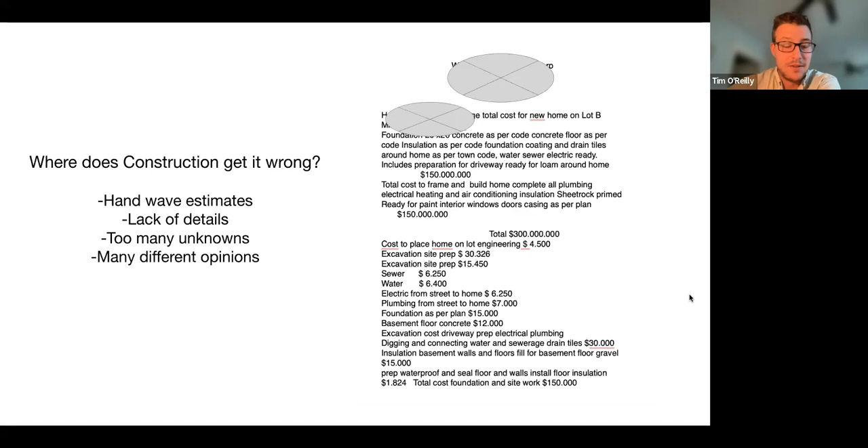Yeah, this is crazy. And in going through here, there's no mention of windows and no mention of painting. So it left a lot to be desired by this woman of, hey, what actually is the cost to build this house on my lot? Yeah, wow.

So in order to not end up getting pieces of paper like that, we've broken the feasibility down into 3 steps. Basically we do an analysis before we come on site, we do a site visit, then we do our detailed engineering review. And those 3 things together allow us to produce the feasibility study and the map.

So before the site visit, that's often starting with a client meeting. Jeff, what's a client meeting you've had recently? Yeah, let's see, gosh, so many.

So typically a client meeting is going over somebody's where they're trying to build. Some folks, I'm up here in Maine, some folks have a piece of land that they're trying to build their ADU on. I get approached often as well with people having a piece of property out in maybe more rural northern Maine, looking to put a standalone home out there. Just kind of getting an idea of what the scope of the project is. Building in a backyard in Portland is different than building on 3 acres in Rockland, Maine. So just figuring out the scope of what they're trying to build, who they're trying to build for is often a key asset.

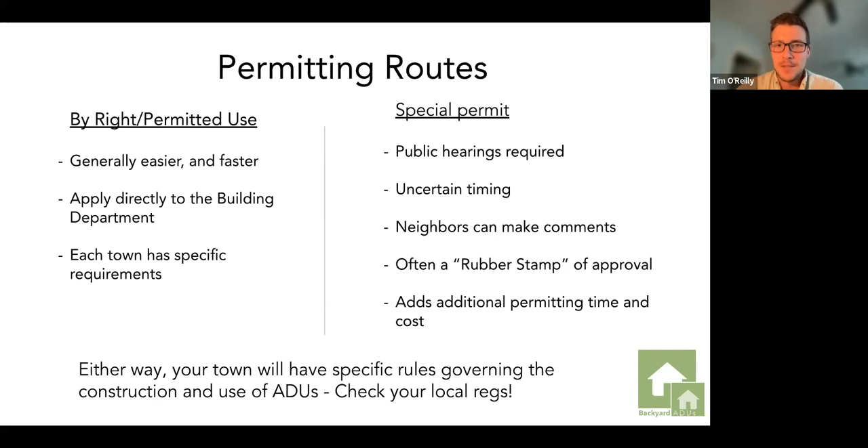Even from a year or two ago, towns that used to require special permits are changing things, either to by right or just in general changing their ADU rules, as they realize there's some rules that can be big roadblocks to building an ADU. So either way, Jeff or I are looking at a lot of bylaws, sort of downloading that geographic map with rules - it's an important thing to keep in mind.

So within that realm of permitting, there can be some snares to navigate. Depending on your town, there may be overlay districts. Those of you that were at the Cape Cod virtual event might recognize this picture.

I stole it from that PowerPoint.

This is, for example, in Falmouth — a couple of the many overlay districts in that town. So not only do you have to find this map and know whether you're in the zone or not, but you have to comb through the bylaw, find that overlay district and any associated rules, because that's going to apply to your property and your build. There are some hazards out there. It's not to say you can't find it, but keep that in mind.

I feel like the most often overlay district here in Maine is the shoreland overlay district. That one just requires being set back from the water, usually about either 75 feet or 250 feet, depending on where you're trying to build. There's a lot of fingers of land and water in Falmouth, and it's usually in places trying to protect the waterways. Harpswell or Phippsburg come to mind, places where there's a lot of shoreland compared to actual land.

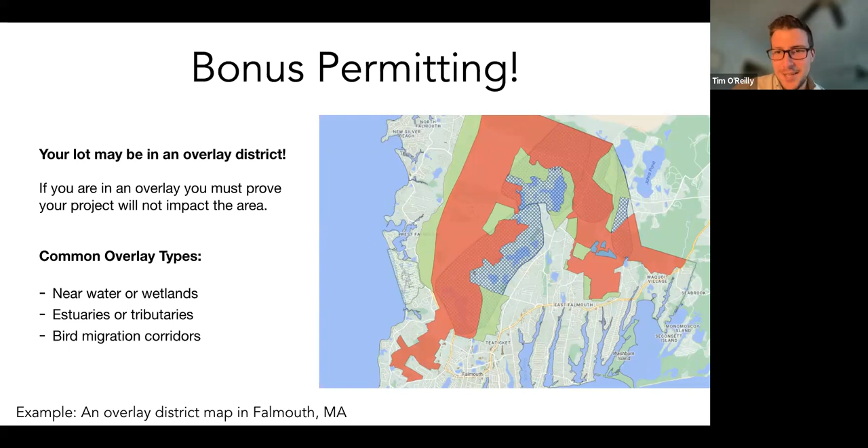So once we do that initial background research, meet with you, and start to know your property better, we'll schedule a site visit. Jeff, it looks like this is one that you did. You want to walk us through it?

This was Tuesday afternoon for me, going through and taking measurements. When we perform the site visit, we like to meet you on site if at all possible. If you as a customer are around, we recap on what the project is that you're trying to do. Usually it's a first time face to face, so that's nice to put a name to the face, and just kind of see the land, look at it through your eyes, and get a good understanding of what it is that you're attempting to do.

These folks are trying to put an ADU on their house. Their house was built in the 1800s, and in order to bypass a sprinkler law — the city mandates that any new building needs a sprinkler unless it's attached to the existing building — they're looking to attach the ADU to their existing home here, which would require cutting down this big, beautiful tree in the middle photo.

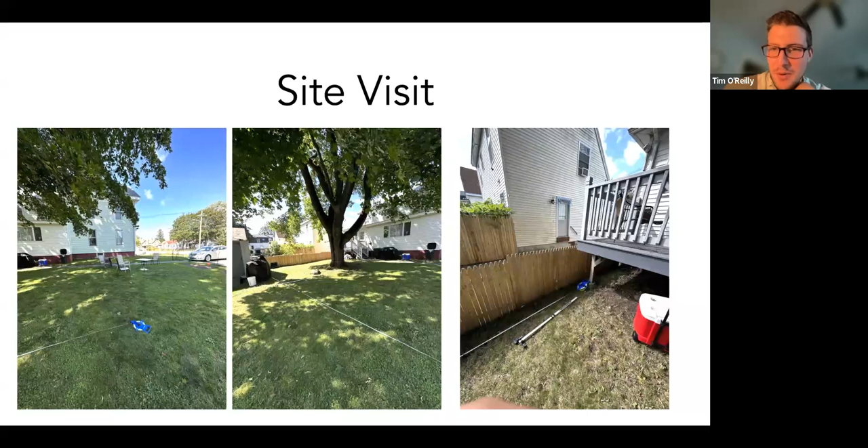It's important to point out we can do only so much from the computer — Google Earth, Google Street View, your town's mapping data — but getting out there and into the field is where we can really see a lot of the details. Like I'm noticing the foundation reveal, where those septic or sewer pipes are, the tree in GIS, but now going in there and saying, okay, that's a pretty big tree, we'll be better able to price out how much it's going to cost to take out that tree, that stump, and attach to the house as well.

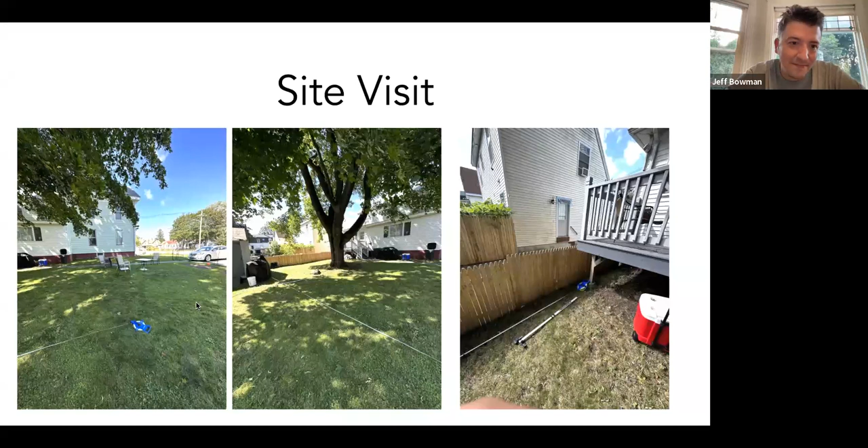Yeah, that tree was 11 feet around. Really? Wow.

Typically when I'm looking at sewers or septics, we're trying to grab some grade differential, shoot some basic topography data to know where is that tank in the ground, where are our pipes now, and where might new pipes be, because the goal is to be gravity fed. If you do need a pump, that's a line item that can be $5 to $6 grand, and then down the line you have to pay for all the electricity for that pump, and if the pump fails there's some maintenance with it. So we're trying to get that figured out up front - how much is my whole project going to cost. If you have to do something like a pump, we're trying to figure that out at this early stage so we can get ahead of it.

We're grabbing data - what's in the ground, how many bedrooms are in the house, how many can be supported, how old's the system, and are there any nitrogen requirements. Because those systems can get pricey and you're going to want to know that up front.

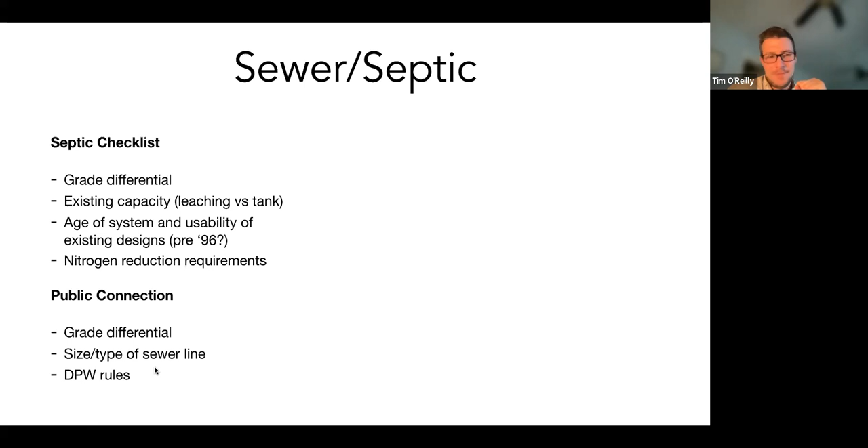If we're on public sewer, again the grade is important for gravity feed. But what are those lines in your house? I've got a photo next that I'll show you. And then, what are any local rules? Each town is going to have rules about how they want to treat ADUs - can we connect inside the existing basement, do we have to go around the house, are there any fees associated with adding more living space? These are all things where we're trying to download that data so we can get you accurate pricing for your project.

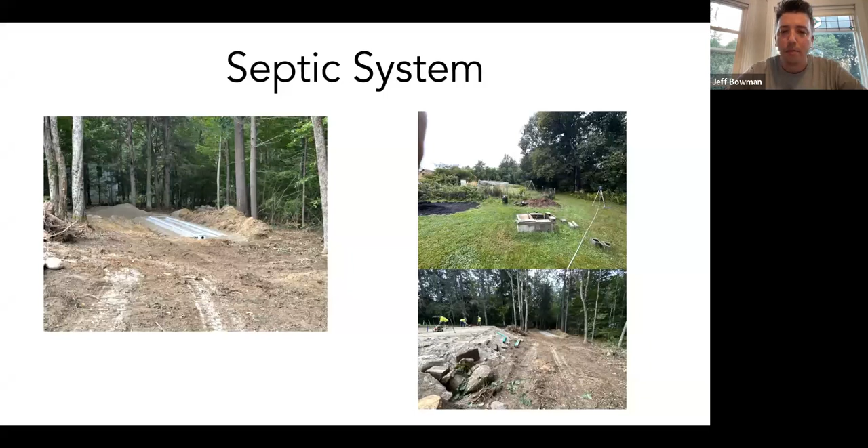Did they have to do any tree clearing here to put this system in? They did some tree clearing. The customer has like 10 acres where he's putting this, so he was not too concerned with saving trees. He would rather the site work team, as he said, clear out the trees that need to be cleared rather than saving a tree and having it end up falling on the house or whatever. So they did end up clearing out a little bit of trees back there where the site was, but it was a fairly natural area to be putting both the septic and the house - they were both rather clear as it was.

This is one. Sorry, Tim.

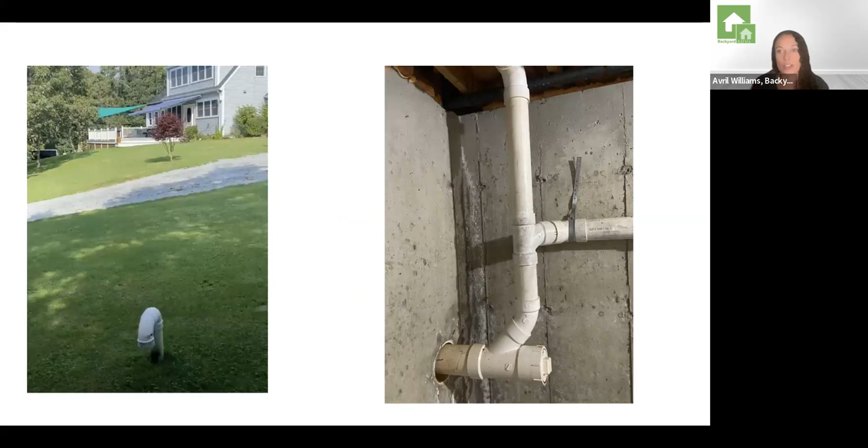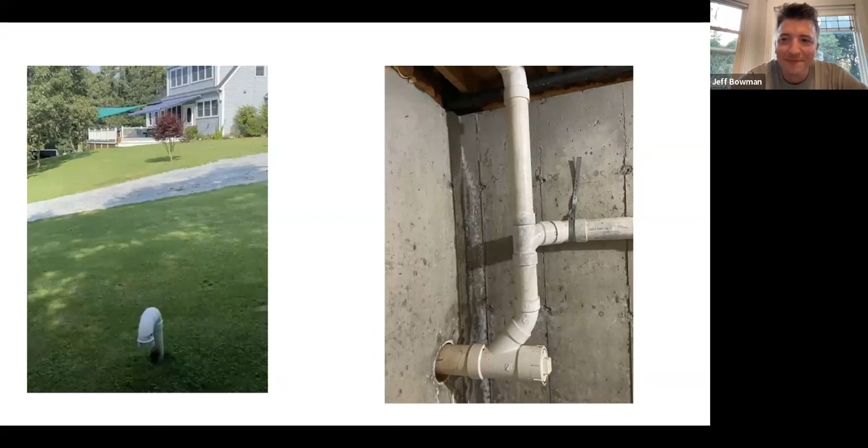This is one basement I saw recently. It's a little hard to tell, but this PVC pipe we see here is 3 inches, and it's going into a 4-inch pipe that goes out to the septic. In this case, they had already maxed out the number of bathrooms they could have on a 3-inch pipe, so I couldn't connect to these existing pipes - I need to connect to the 4-inch. So even just popping into the basement, I knew when I'm outside thinking about the ADU and where it's going to go, I'm either going to have to come into the basement to connect to the 4-inch or go around outside.

On the left, this is one I saw recently. I pulled into the driveway and said, okay, I know where I'm going to start. I ran out to the yard and found their leach field - this is the end of it where they have a vent pipe. Obviously I'm downhill and away from the house, so it's no surprise the septic pipe is leaving this corner of the basement. Their tank is somewhere here, then it's coming under the driveway and leaching. So I knew, wherever I was going to be thinking about putting an ADU, how might I be able to connect to that tank and use the leach field. I still needed to go grab the records from the town and get more information, but at least on site I could start to triangulate and figure out what's going to work and what might not.

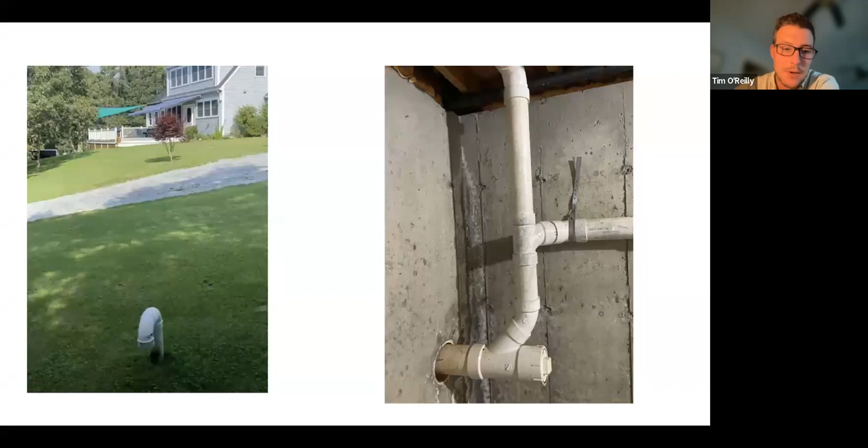Speaking of town, this is another one I did, and I reached out to the Board of Health. If you're ever unsure of your own septic records, reach out to your local Board of Health and ask for anything and everything they have on file. This is one I got - let's see, can I zoom in? No, I can't. But it's telling me how big their tank is, what kind of leaching system they have, and generally where it is in the backyard. So again, I need to do a site visit to figure out what's going on, and this is pretty old, so what's changed in terms of trees and all that. But this got me started to say, where are these things and how might we be able to make this work, or do a new system.

This makes me think of a case we have out in Harpswell, actually on Bailey Island, and I have Kevin doing some sleuthing right now behind the scenes. We're trying to figure out - we had a handwritten note from somebody at some point saying where they thought the septic was, a previous property owner. That was the only documentation we had of the septic on the site. So right now we're doing our due diligence to figure out where it actually is, if it even exists, and what we might need to do in order to build, because we have to make sure we have this septic in line before we build - very early stages. But all that to say, sometimes the town doesn't have official records. I've found, at least up here in Maine, some municipalities are still putting their stuff together.

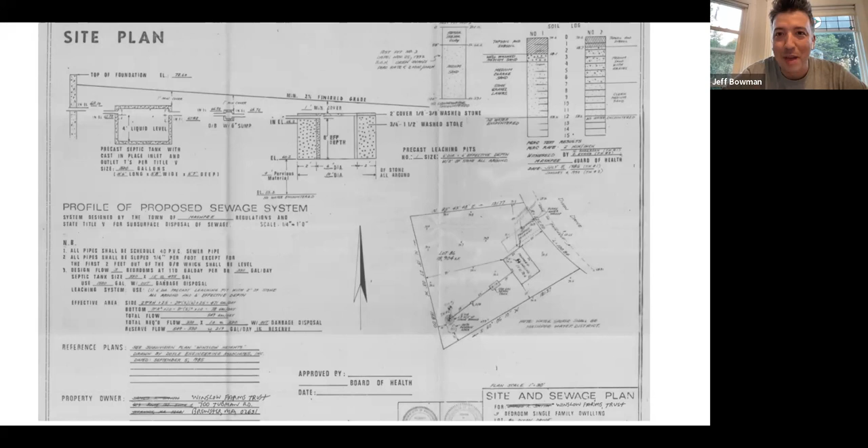But it doesn't hurt to ask. Yeah, you got to ask that. We got to know what the town knows and what's out there.

In Mass, Title V came into existence right around 2000, or the late 1990s, so all projects we're doing now need Title V compliance and/or documentation - hopefully your town has that. In this case, this was from the 1980s, I believe, so even if we tried to connect to this system, we were going to have to do a perc test and bring this up to Title V compliance. So I put that in my report and said, hey, we're going to have to spend a couple thousand dollars here to make sure we can use this system, or worst case scenario, do a whole new system.

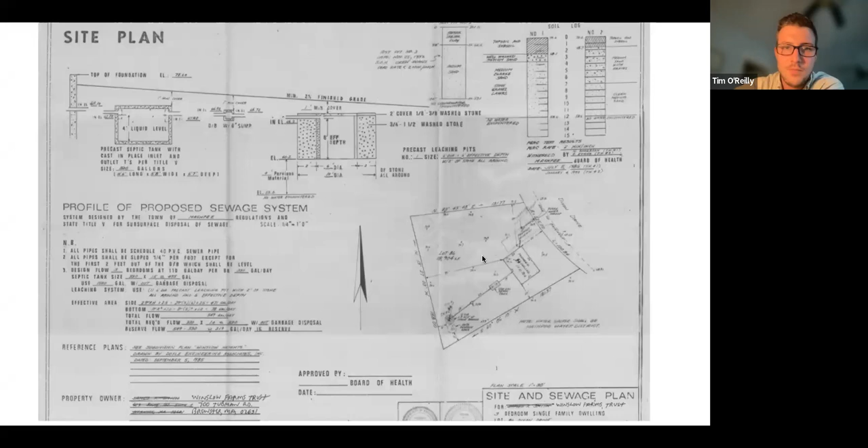We do have a question, and I think we're going into it already. Looking to build a standalone ADU in the North Shore Peabody area, what determines if you can connect to city water and or electricity?

We'll talk on electricity in a bit. Your town is going to have their own rules of what they want to see, specifically the DPW. ADUs are so new your town may not yet have those ADU specific rules. But for connecting to public water, we'll look at a couple of photos in a minute. We're typically connecting inside the existing basement behind the meter. So we'll want to look and see what's there, what's your pipe, what's the size, to hopefully figure out if you're going to have any water pressure issues.

It's usually the size of the pipe. There's different materials and then different sizes. And it's not only the size of the pipe, but the size of the meter. Often the meter size is smaller than the pipe. So even if you have a big enough aperture in your inlet pipe, you may need to upgrade your meter to allow more water to flow through to get the water and pressure you need. But it also depends on what's your current usage, how big's the ADU, how much is getting connected to it, and how close is the ADU to the house, and all kinds of factors.

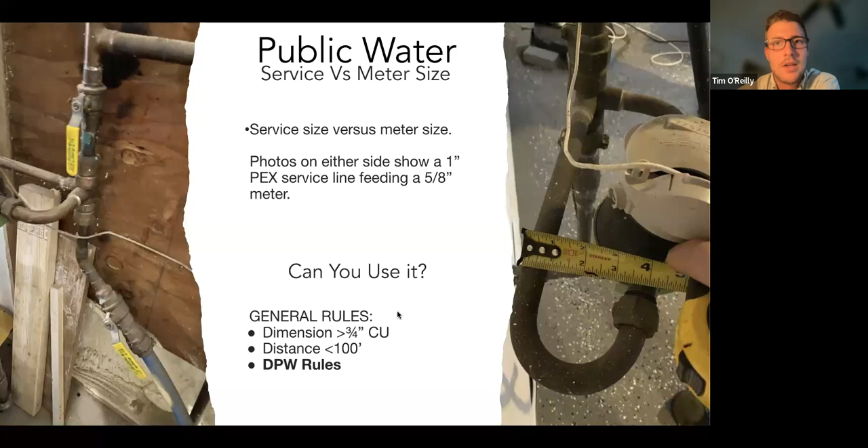The electrical is often not governed by your municipality. There are a couple municipalities here in Mass that have their own electrical, but often it's a third party. Here it's Eversource, or National Grid. What's it up there, Jeff? Central Maine Power, CMP, unless you live in Kennebunk or a few other random towns that have their own thing, but by far and large it's CMP, Central Maine Power.

These companies have their rules and specifications for how they want to see an ADU hooked up. Typically on our end, designing and building them, we want 200 amps for that ADU since we're doing all electric. We have to heat the hot water with electricity, heat and cool with mini splits which is electric, and then we have appliances and lights and everything else. So that's what we're aiming for.

Sometimes you can connect to the existing house, depending on what's there, and run a sub panel. But if you have big load items like a pool, a hot tub, or you're heating your house with heat pumps, oftentimes it's best to separate these so you don't have any issues. That's typically in the form of a second service. If you're a standalone house with your own service, we'll request a secondary service, so you have a new meter, a new account, serving just the ADU.

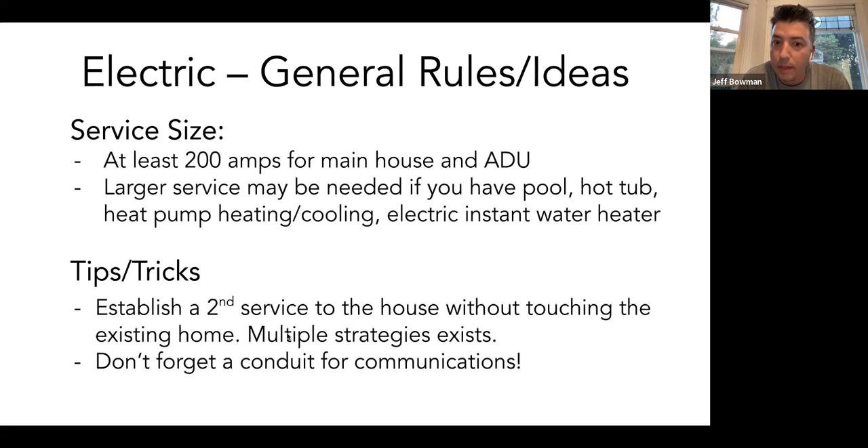That meter can either go next to the existing meter on the primary house, or right onto the ADU, or I've seen it go right on the electrical pole that runs to the ADU. So those are all things we factor in for what would be best for the situation, both cost-wise and what would be most ideal if you want your sight lines, if you don't want overhead, and all kinds of things.

What we're looking at with these is typically, where is it, but also what is it - so what's the conduit size. If we're trying to run that 200 amp cable, it's a big thick cable. If you have a big enough conduit, we can share that conduit that's already there, so you don't have to do any new digging. But there are certain rules for how big the conduit needs to be to run certain size lines. That's what we're looking for.

Also, if you're underground, where is the infrastructure? Is there a transformer? Are we coming off a pole? How far away are these? That wire itself I was talking about these days is about $20 per foot, so if we're going underground it can start to add up quickly if we're doing really long runs. We're trying to get our eyes on this stuff on site and figure out what's there, so we can know what it's going to cost to get it all hooked up.

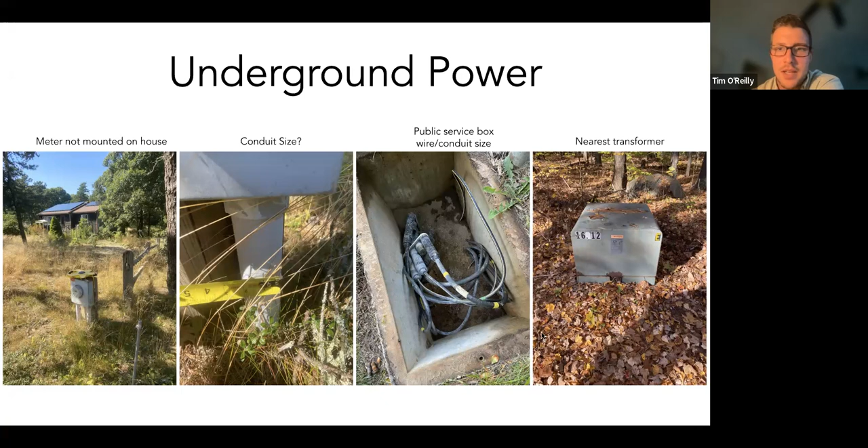The pole itself didn't have capacity for putting on anything more, so we ended up having to put a mid-span pole in and do it that way.

That's a good point, Jeff. Even if all these things are there, the transformer's nearby or the pole is there, we still have to go through the verification process with the engineer for the power company, because they're going to have access to the data of whether you can get what you want from that location. The power company's sort of always a thorn in our side, a black hole of bureaucracy. But this is what we're able to gather at that feasibility level to try to eliminate some uncertainties, to know that the new ADU can get power, or at least point out that this might be an issue moving forward, but we need to delve deeper to really know.

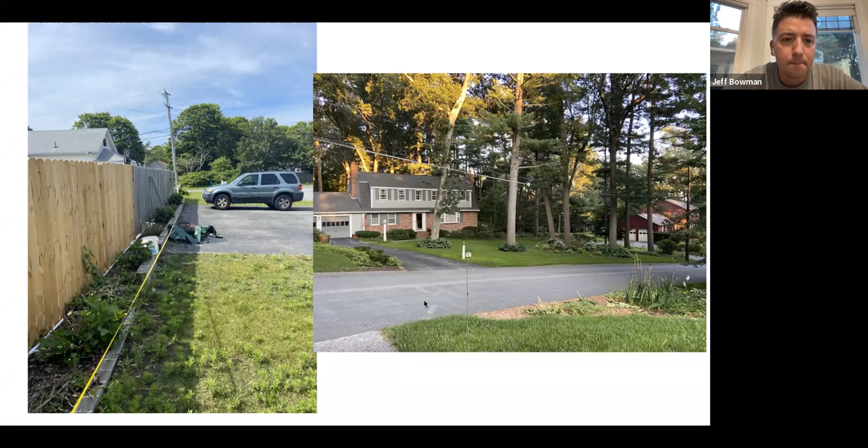You would need to work with an independent solar company, but we'd bring them into that design process to get feedback. Up here in Maine, we take cues off of how they do it elsewhere, and figure out how much energy you'd need, what your expected use would be, and what the car charger draw would be. We factor that in and work with the solar company to place the solar panels on your property. When we're building the house, we'll run all the right wires so the car charger can get hooked up, with solar chases in the right area and all of that.

So yeah, we bring our whole team in. Then the best part is getting out the deliverables, which has three parts. The big one is the site sketch. I always joke it's like a bootleg survey. Instead of paying a surveyor a couple thousand dollars to get that plot plan from the outset, we try to get ahead of that now and identify what is on site.

What are your setbacks? In this case, she had a shed on her site that needed to get moved, so we showed her shed setbacks and where she could move it to. We tried to gather plant data on site, like where trees and bushes are and what might need to be removed. Access: her driveway, does she need to expand it and add additional parking? How are we going to have access to the site for machines, trailers, and cranes? Where's our construction access?

I took transect data of where the septic is in the yard, what the elevations are, and can we have gravity feed to that system? Where's our water line, where's our electrical service? All this stuff we gather in the field, we compile into the site sketch, which our goal is to be pretty darn close, so that up front you know if this is possible or not, without spending a couple grand on a surveyor without knowing that.

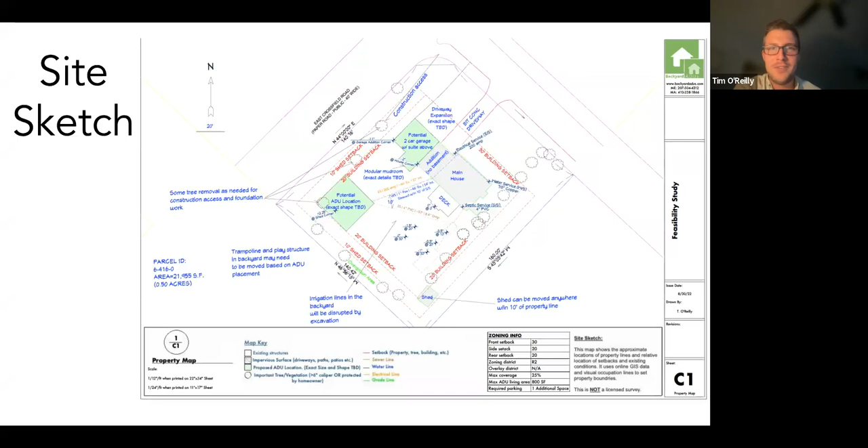If you're a builder, like that thing we looked at the beginning, and it didn't include $1,500 for the police detail, you're going to end up paying for that. You just didn't know about it when you started. If it's not explicitly covered in the feasibility study, it's a factor we take into account, especially based on where you're trying to build, your municipality, and the size of what you're trying to build. If there's not a specific line item in there, it's already been factored into the feasibility report, and we'd be happy to talk with you about how we got those numbers.

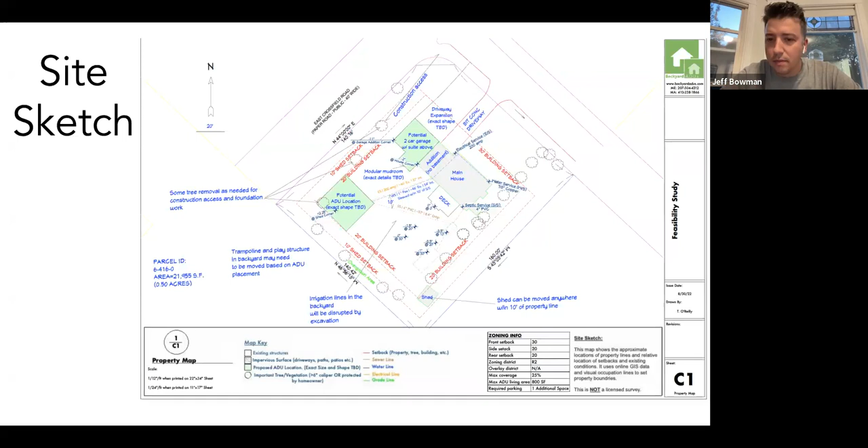Let's look at that report. I pulled one up that I was working on recently. This is one I delivered to the homeowner after my site visit and our back-of-house engineering and architectural review. We looked at all the permits. What did they need? In this case, they needed conservation permission before approaching the ZBA, so that was important for them to know.

This was all the stuff about their lot. We went over their specific ADU requirements - what's all in there, what do you need to abide by, and also what are some cost implications and how might that affect the price. Electrical - what's there currently, what do we recommend, are there any notes or follow-up activities we need to do. Same with the sewer and the water - what's on site and what are our recommendations on the best way to move forward.

What is going on site? Are there any grades we need to think about? Are there considerations on site that are going to impact the project? Then any notes on site work, and obviously cost implications. We're going through all these detailed parts of the project to get you granular information about what's possible. And to answer the question about logistics with the crane - what's in the crane's way, what are some of our length restrictions on size, do we have any trailer length restrictions, and what might we need to do to get the crane in there?

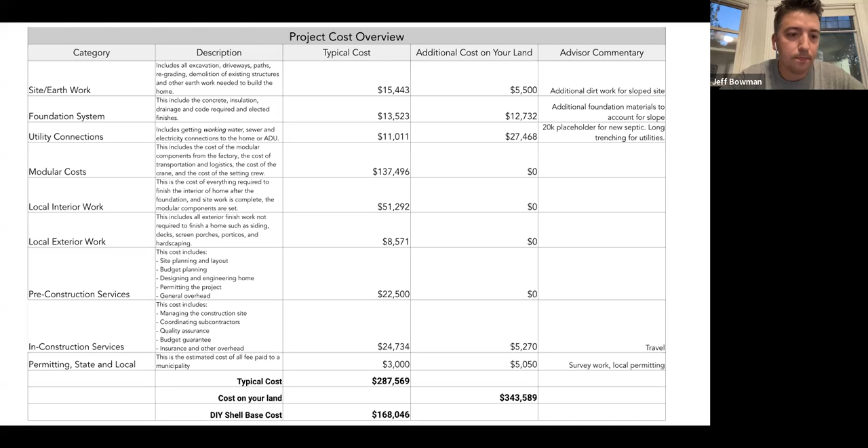And we did have a finance question: can you use the money from a home equity loan for an ADU? Yep, that's a great way to fund one of these, is get that HELOC and then use that to build your ADU.

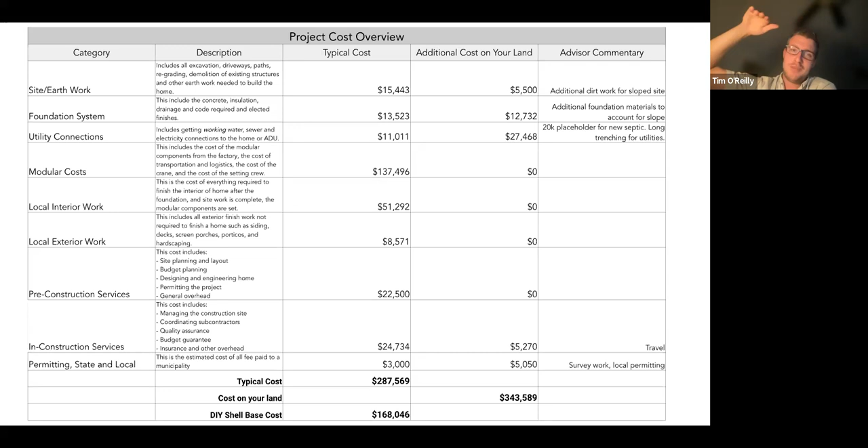The last thing to add is the thing we're typically not including is appliances, so factor in a couple thousand dollars for appliances, but that's the only thing that wouldn't be in here. Our goal, going through all these specific things, is to be really darn close, but I'd say we're within 5%, maybe 10%.

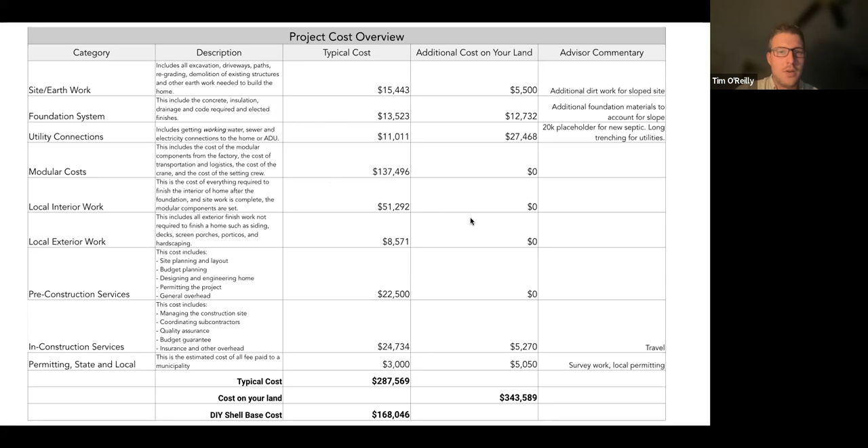We're obviously going to dive into the design phase next and really pick all the finishes and do the design, so some of these numbers might change a little bit, but we're trying to shoot and hit the bullseye so you know exactly what it's going to be.

All right, so you get the report, you get the map, you get the detailed pricing. But Jeff, this is what I was going to say—I think the best part is the follow-up. We had that initial conversation, we say hey, we're going to do some background research and get back to you on what might be possible.

What I love about doing these feasibilities is the mystery of it, trying to solve all this stuff, but getting to know people and also helping them on their journey to figure out what might be possible. For however many of these we do, we don't build for everyone, but people use them as a tool, and that's really validating—to know we're providing a document that can help you figure out what might be possible.

I think some people assume that by having us do their feasibility study, they're potentially contracted to build with us. So it's a good point that people can use this for anything they'd like.

Yeah, and that's our goal. So we charge $600 for this, which basically just covers our time, like you saw tonight, to do all this labor. But ultimately the goal is to have a low barrier to entry—to know, hey, I'm here researching small homes, researching ADUs, or my mom needs a place to stay—for that low sticker price.

You're going to get a lot of information that you could go off of. You could pay an architect 10 grand to design a house, and that still doesn't get you all that detailed information and budgets.

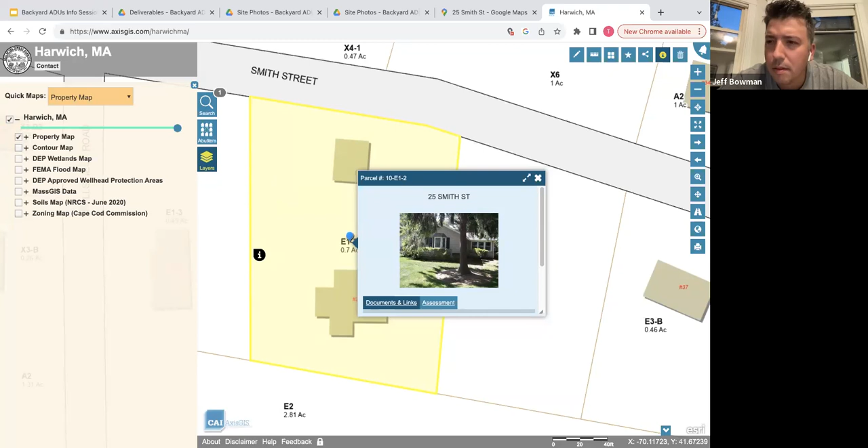Always do heat pumps, correct? Yep, we always do heat pumps. You can have a wood stove put in there if you'd like. We'd work with you on what the best way to do that would be. And if you wanted to put solar on there, it's just a matter of how much capacity you think you're going to have in order to be net zero.

Typically our homes, let's say an 800 square foot home, would require a 7 to 10 kilowatt system. If you wanted to have a car charger and electric car, all of that, you would just add more capacity, which is really just adding more solar panels.

Yep, exactly, well said. All right, well let's do a quick cruise here. So wherever you are in your town, go Google your town's GIS maps, look for your property, and hopefully they have something like this - layers - so we can start to pull in some data. There's oftentimes some basic contour data. Hopefully there's some documents and links.

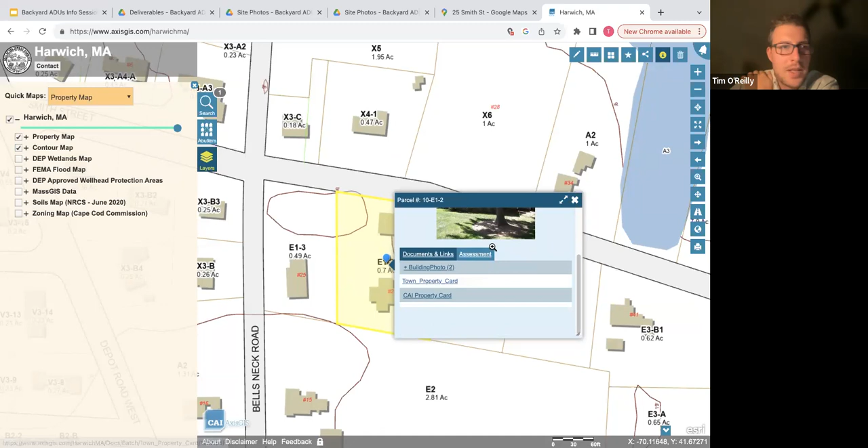So what's your property card? Should have a bunch of information on there - your zoning district, your assessment data, your footprint, things like that. But what we're looking here is, okay, contours is good. Yeah, are there any wetlands? Trying to add this stuff in.

I'll typically try to add a bunch of stuff, and this isn't the best example - they don't have all the layers we want to see. They're not showing me water lines in the street or fire hydrants or anything like that. But I'm starting to get a sense that there's some sort of depression here. There's the main house, there's an outbuilding near the street, probably a garage.

But let's go look at it on Google Maps. So, okay, it is a garage. Let's take a look at the street here. So it looks like there's overhead power - it's on the other side of the street. We were looking at that contour data, and so yeah, it seems like there's some sort of depression here.

So that might be an example - what are we doing with fill and site work? There's also some trees to be considered here. If we look around, depending on where this homeowner might want to build, looks like there's already some sort of secondary access to the property. So that's good, like for a crane - if we take a couple sections of the fence down, we can get in here.

We want to make sure they can turn off the road, but also get those trailers, those house parts, through. Can you get a 70 or 60 or 50-foot trailer down here? Let's take a look as well.

So where are the other things? Utilities—electric was across the street. For this homeowner, being on Cape Cod, they're probably on septic, so I'd reach out to the Board of Health and say, this is the property address, can you send me all the records you have? I don't know if they're on town water—unfortunately I don't have that layer here, but that's something I'd ask the homeowner. They're going to know. I can get some of that information from the office, but it's not until we go there and actually see what's happening that I can plug that in.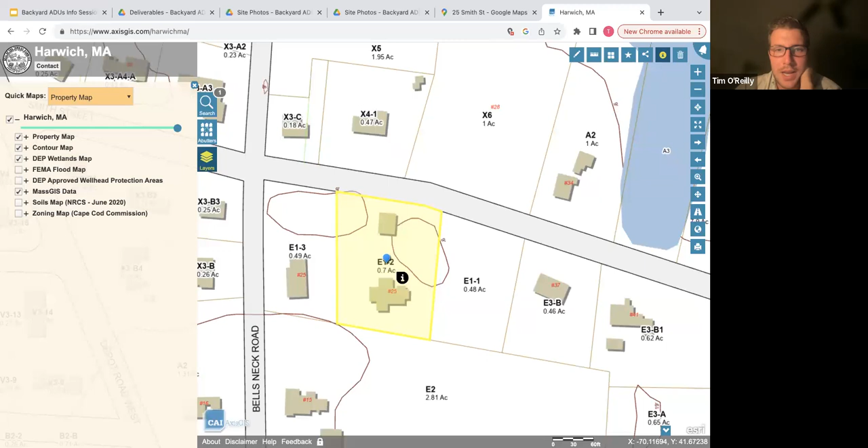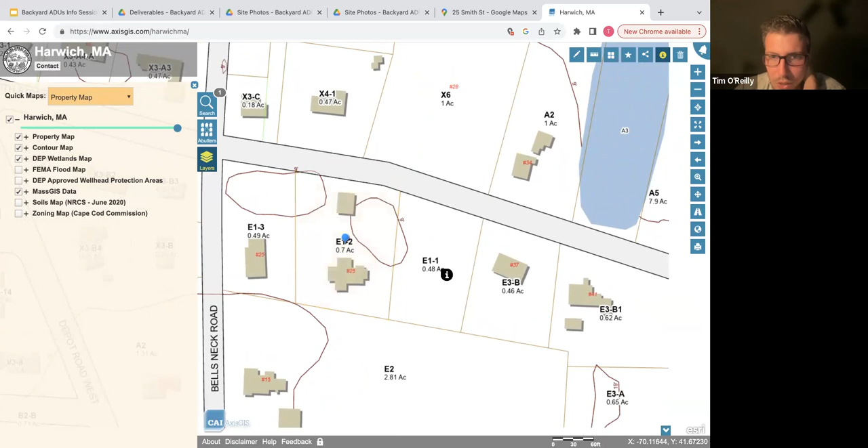The other thing I'm seeing, just shooting from the hip, is this is their lot, but there's also this lot next door, which may be owned by the neighbor, but may also be owned by them. If it is, and it's a buildable lot meeting the frontage and lot size requirements, they may want to build on this lot as a single family home, which would have easier financing routes—they could go to the bank and get a more conventional construction loan versus something like a HELOC we talked about earlier, versus building it on this existing lot.

Yeah, if that was their lot and they could subdivide in the future, they could sell that. We could build it as an ADU on their lot—there's room for that—but they could also sell the other lot as a whole thing on its own. If that was something they wanted to do, we'd factor that in terms of utility connections, making sure it's its own standalone home. Ultimately, what's the value there—the same structure as an ADU, or on its own lot?

Cool, so we're really running out of time. I was hoping to go over the bylaw and show you the rules in Harwich, but ADUs are possible there. I would need to do a site visit to be able to compile that report, put it all in the site sketch, get the engineer and architect's eyes on it, and then do an accurate budget.

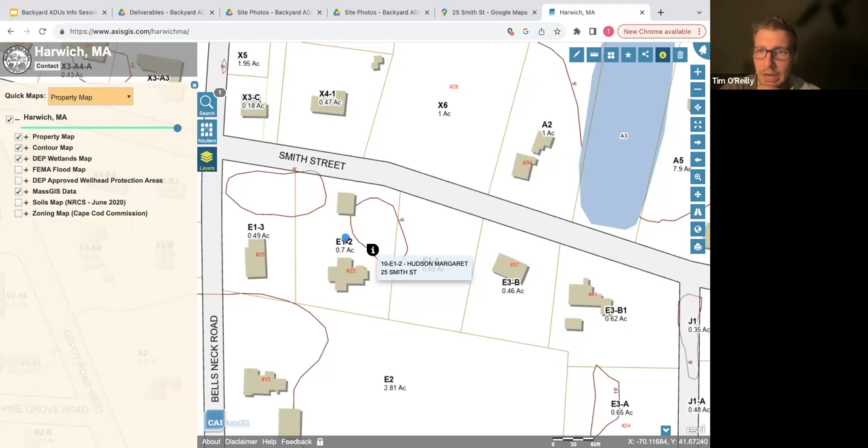Any final questions, April? I think you got some specific questions here, Tim, from Slava.

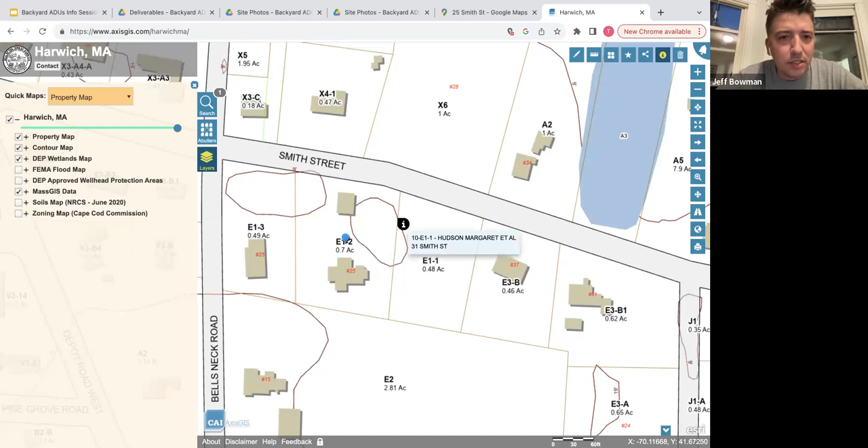You got one saying you had spoken over email with her—can you rent this for Section 8 or government rental, or are there requirements? I'm not an expert on Section 8, but we'd want to talk more about who this is being built for and how. Certain towns have grant programs—if you're building an ADU for affordable housing, there are grants available, but it's very town dependent. So I'm doing some background research for them.